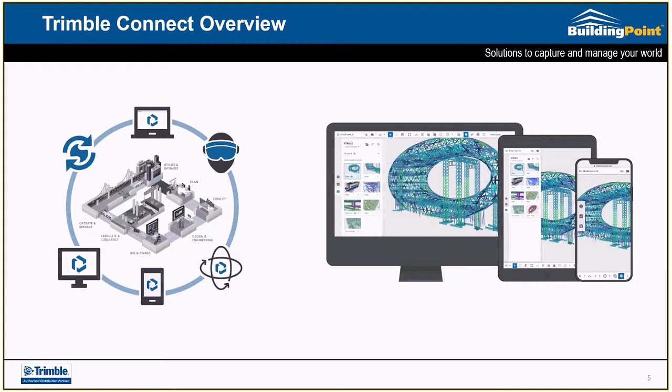A little bit more about the overview: Trimble Connect is bringing formats together in a way we couldn't before in any other common data environment. RVT or Revit files are one of those major leaps in the right direction. A truly common data platform is essential when reading these formats—IFCs, DWGs, DXFs, STEPs, IGES, SKPs, Revit files, and now we can add Tekla files as well.

So if you have projects where you're on the surveying or construction side, working with architects giving Revit files, and structural designers or detailers giving Tekla or IFC files, you can bring all those together into one common data environment. View it all in one location, create RFIs, create your own views, modify elements—move an object from point A to point B, then go out and load Trimble Connect on your tablet to start setting out based on that.

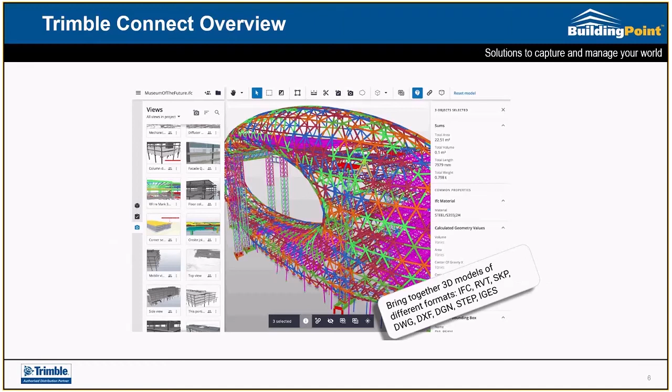It's important to realize Trimble Connect isn't just a model platform—think of it as a free Dropbox that enables you to have as much data as you like. Whether using text files or Excel files, you can load all that into Trimble Connect and it'll open up in the actual format itself on your desktop, even though it's in the cloud.

All data is live as well, so you don't have to send those Friday afternoon emails for deliverables anymore—you can just upload them, and people will jump on and keep you guys accountable. If you said you'd upload it Friday, they can check Monday to see if you actually did. A lot of people these days work from home or on the weekends, so you can track those changes as well.

So that's pretty much it for the Trimble Connect overview. Pencil down any questions you might have before we jump into a live demo, as well as getting started with Trimble Connect.

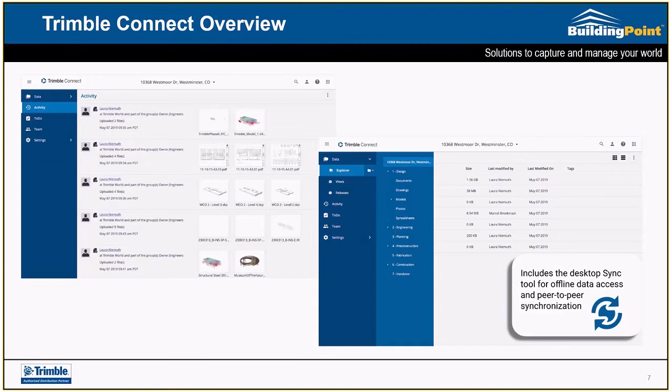Getting started with Trimble Connect.

Now all you need is a Trimble ID. Trimble IDs are universal across all Trimble products, so most of you will have one. If not, they can be easily created by going to a Trimble Online Programs landing page, such as Trimble Connect. You can just type in Trimble Connect, pop it up in Google, click on it, and sign up. It's free and it's universal.

So if you happen to use TBC, RealWorks, Tekla, or SketchUp, Trimble IDs can be signed in on those as well, again universal. Now a free license of Trimble Connect enables you as much offline use as you like, so you

can view and collaborate on your desktop. When we move on to online and cloud-based collaboration, we can have 10 online projects with unlimited invites. That's until the end of June. Then that will be tailored back to 1 online project and 5 invites.

Basically 50 cents a day is the going rate for Trimble Connect at the moment. So if you guys would like to invest in or investigate any of those, feel free to reach out and we can put some pricing together around your current workflow.

So now I'll jump into a quick little live demo. It'll only be a couple of minutes worth, and then we'll jump into the next stage.

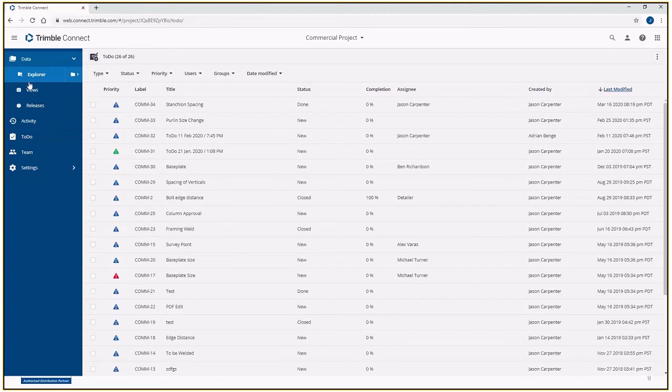What we'll do from here is actually open up one of the files. So we'll open up this 3D model. We can open up a 2D drawing as well, but for this one we'll open up the 3D viewer.

So this just takes a second to load up, and then we can view this model in the 3D browser. Once it's in this 3D browser, we're able to do reports, and we're also able to colorize the model how we see fit. We can also do this for drawings.

Now any survey data that you've got as well, we can load that into Trimble Maps, and I'll show you how to do that next, and we can load that up and georeference all our data.

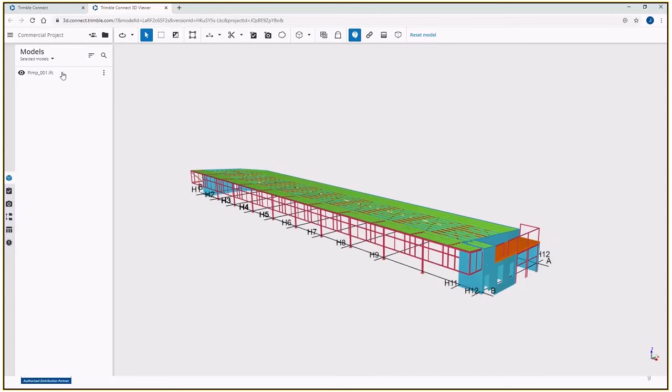So this is our structural model. If we go to see details here, we can see that it's version 4. So revision control is a thing of the past - revision control actually happens automatically through Trimble Connect.

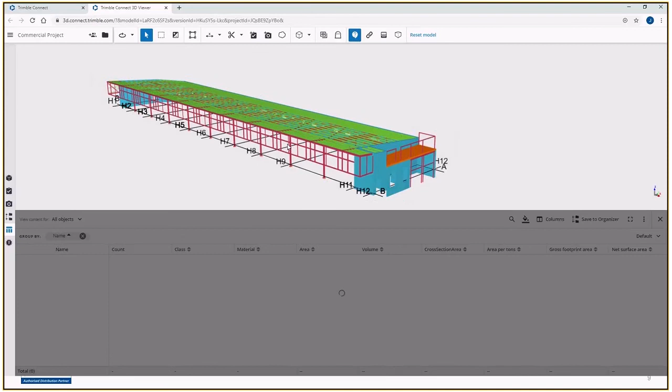We'll move down to the reporting side just to show you guys what it can do. Something as simple as this, filter by name. Let's go filter by class, so IFC class, and hit colorize. And all these columns here are actually able to be edited, so we can add our own parameters if we do feel so as well.

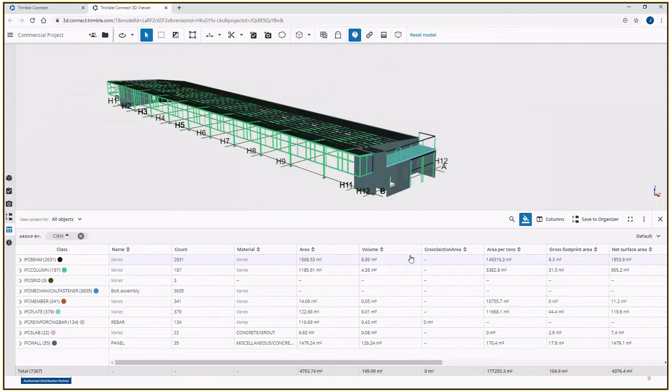We can export this list to Excel, or we can print this list as well.

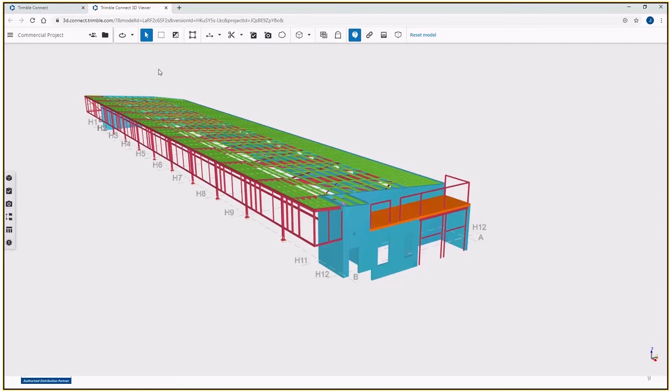Now if we were to start getting points - let's say a point of a location, or we've got a whole bit of survey data and we wanted to make sure that everything was in the right spot - we can actually get the X, Y, and Z coordinates to each point. So we can select a point here. Just give it 2 seconds. Select that point, and it'll give us X, Y, and Z coordinates to each of those points.

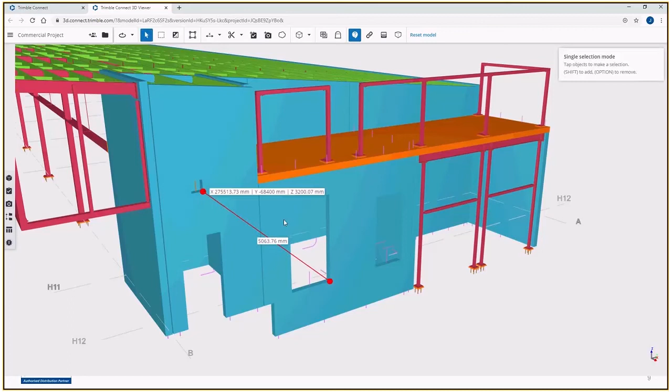We can also do dimensions, basically from that point and down. It doesn't do your X, Y, and Z, it'll just do your linear dimension. It'd be great if it did, and we'll just wait and see if that's a feature coming.

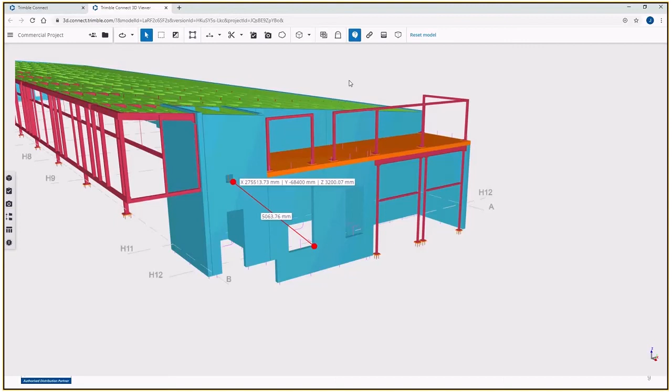Apart from that, a lot of the stuff up the top is all your very generic model manipulation and model viewing tools, which I won't go through, but if you have any questions, feel free to reach out and we can touch base on that.

Now, this is the web viewer, this is the web browser. If we were to apply for any of the other applications, we can just go up to the cube here and open up the applications. This is where we can download the desktop version, and then I'll show you through the desktop version as well.

So we open this one up, and what that would do is give us a download page, and we're able to download Connect for Windows. Now this is basically used like a Dropbox - we can drag and drop all your files into here and then synchronize that up with the cloud.

So we'll jump into here. This is the desktop version, very similar interface. We can drag and drop any file we like - we've got PDFs, sketches, photos. We can drag and drop here and hit publish, or upload all files to server.

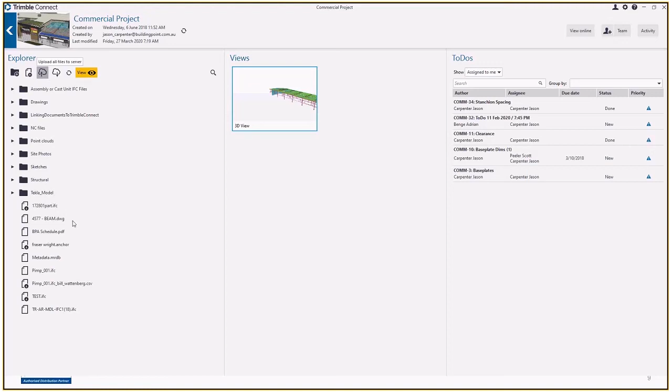If we were to go into the 3D view, simple as this, we've got all the same functionalities. We've got clash checking, and we've also got document linking.

So if you've got, let's say, a point on site - something's just happened there. Where am I? Cool. So let's say you've got a point out on site and you wanted to take a photo of that point and make sure everything is in the right spot.

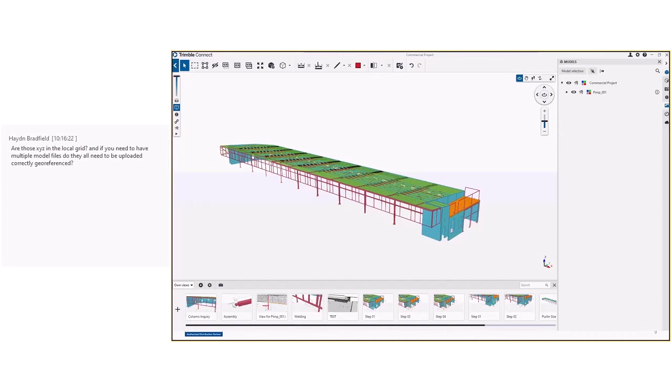You can actually take a photo and assign it to that point, like this. We've taken a photo of this column, applied it to that column, and away we go.

If you're using Trimble Connect on the SiteVision units, or any of your mixed reality applications, it'll actually geo-reference these photos for you and publish it into Trimble Maps, so you won't have to worry about attaching the photos.

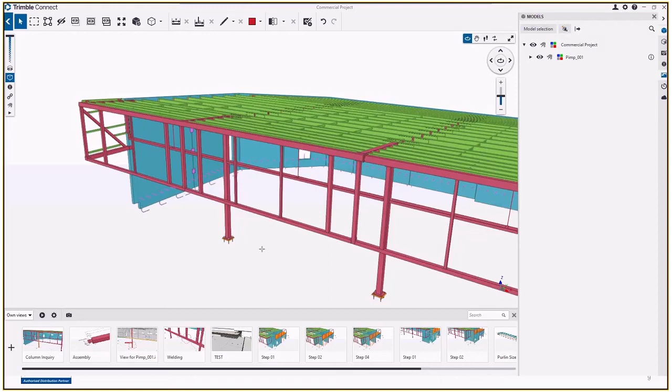Furthermore, I won't go through any further on the modeling side, but we can actually load in point clouds as well. So we can modify and view point clouds in here - we can adjust the thickness to our own computer specs and the size of the points as well.

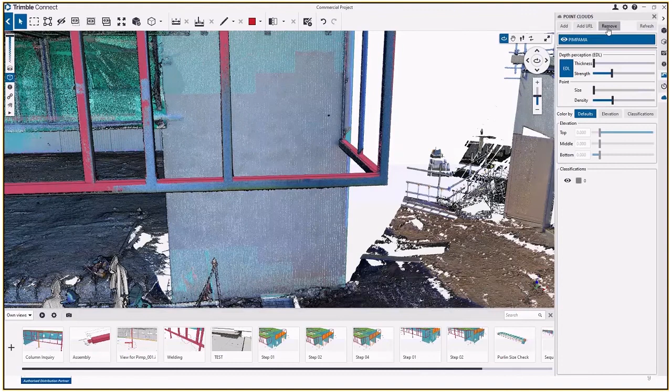Now, just for ease of the demo, risky, but let's do this - a 4.2 gig point cloud, loads instantaneously. So once it's all been processed on one computer, you don't have to be processing it on the next - you can just load in this Potree file and away we go.

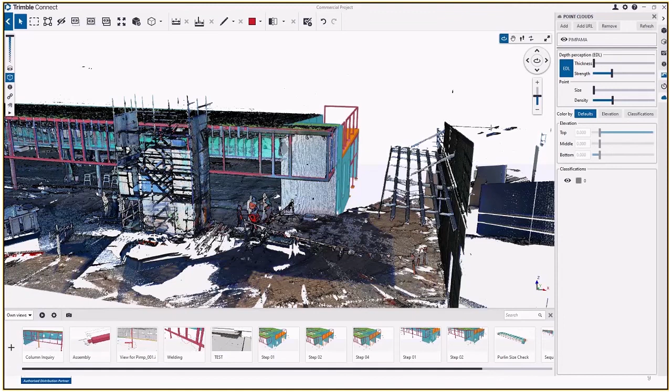Cool. Now I'll go through the next spot. I can jump back into the live demo as well at a later point, but for now we'll just move on.

Trimble, we've got connect-support@trimble.com - that's their Trimble Connect support line, ideally used for any features that are not working properly or not synchronizing. Unfortunately, we can't troubleshoot that where they can. There is an online community as well where any documentation, getting started, any questions you may have, you can post up there and see whether anyone else is using it as well. It's basically a forum.

So Q&A - if anyone's got any questions, feel free to drop them into the chat below. I know this is all short and sweet, and we can go through it in further detail if you ask. So we can move on from here.

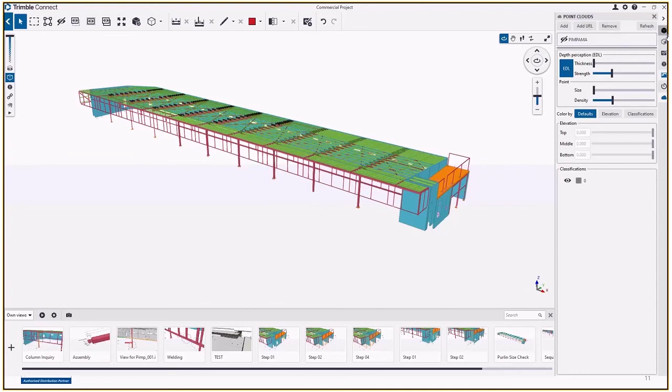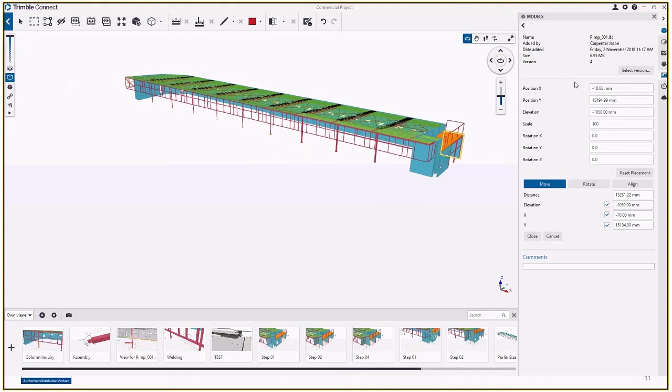So basically moving from point to point shifts it. Now that's based on its own model origin. In saying so, those points are local in regards to the model, not the actual project - it can be the project, and it should be the project if the X, Y, and Z coordinates are right. So that's the answer to that one.

Cool. Awesome. Just wait a couple of minutes. If anyone else has any questions, we can run through those.